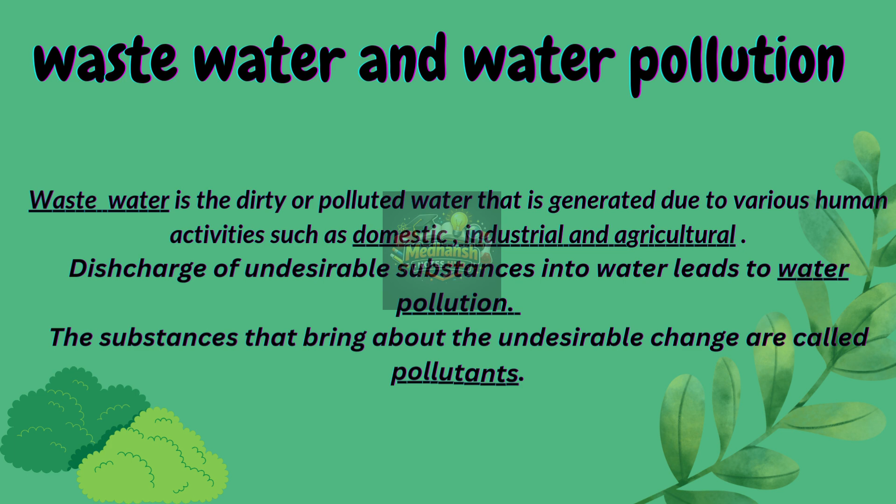Wastewater and water pollution. Wastewater is the dirty or polluted water that is generated due to various human activities such as domestic, industrial, and agricultural. Discharge of undesirable substances into water leads to water pollution. The substances that bring about the undesirable change are called pollutants.

Sources of water pollution. There are many sources of wastewater. Some of the important are as follows. Industries and factories produce large amounts of waste that contains toxic chemicals. Many industries do not have proper waste management systems, and the waste mixes into rivers, canals, and later the sea.

Mining activities release several harmful metals and elements which, when mixed up with water, pollute it. Oil spill is a huge concern as large amounts of oil enter into the sea, and a small leakage from the sewer lines can pollute the underground water.

Leakage from the landfills. Landfills are huge piles of garbage that produce an awful smell when it rains. The landfill may leak and pollute the water.

Domestic waste is the waste generated in homes due to day-to-day activities. Human excreta, soap, and detergent pollute the water.

Pesticides and fertilizers are used by farmers for better yield and to protect crops. When these chemicals mix up with water and go to the rivers and seas, they cause many damages too.

An effective sewage system is made up of a network of pipes that carry wastewater to the main sewer of the city. Sewer: the pipes that carry wastewater are called sewers. These sewers are coated with PVC, polyvinyl chloride. The sewer of our house is covered by a manhole cover. The manhole cover helps people go inside and check any leakage and blockage.

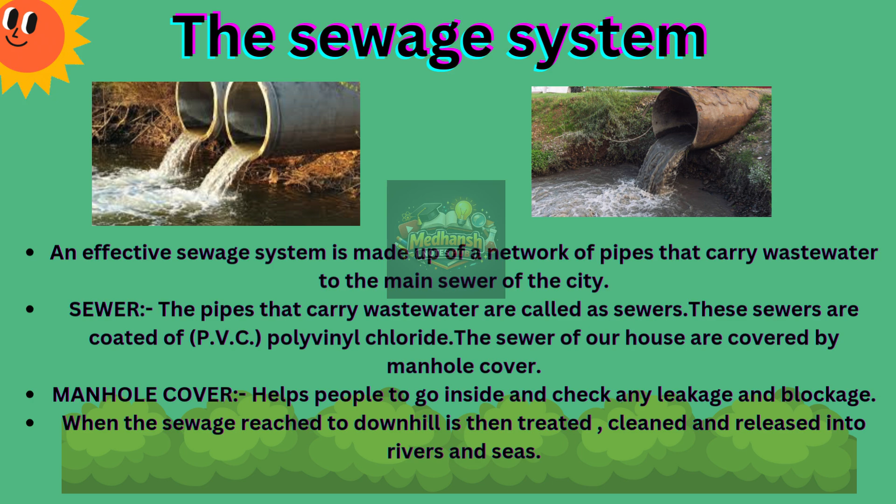Sewage that stagnates as a puddle or pool breeds vectors of diseases such as mosquitoes and flies. This might spread jaundice, malaria, elephantiasis, cholera, and other such diseases. Sewage might pollute freshwater sources and public water distribution systems. Polluted water can act as a carrier of harmful pathogenic organisms that spread diseases. Exposed draining of sewage, especially from hospitals and industries, can cause community harm.

A wastewater treatment plant is a facility that uses physical, chemical, and biological processes to remove pollutants from wastewater. The treated wastewater is then either reused or released into nearby bodies of water.

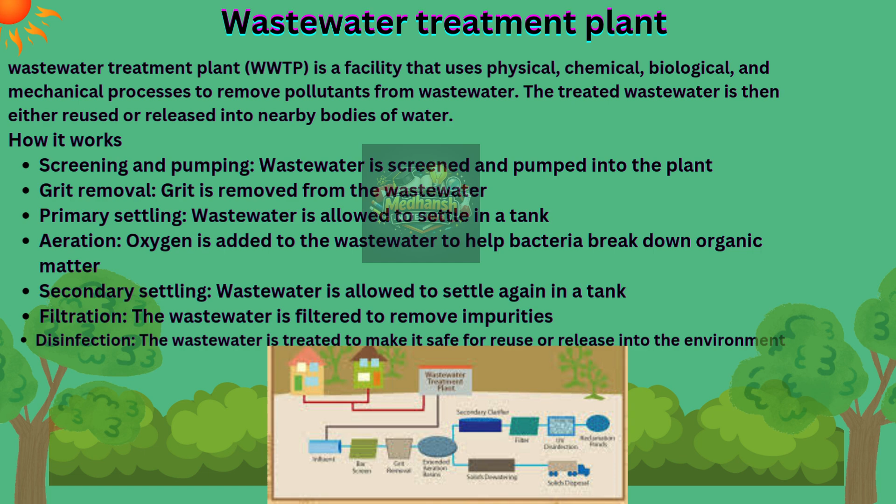How it works: screening and pumping. Wastewater is screened and pumped into the plant. Grit is removed from the wastewater. Primary settling: wastewater is allowed to settle in a tank. Aeration: oxygen is added to the wastewater to help bacteria break down organic matter.

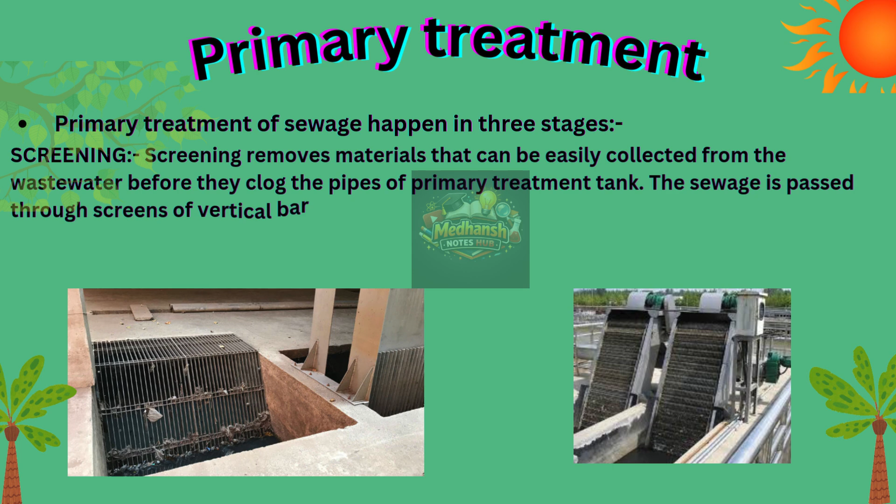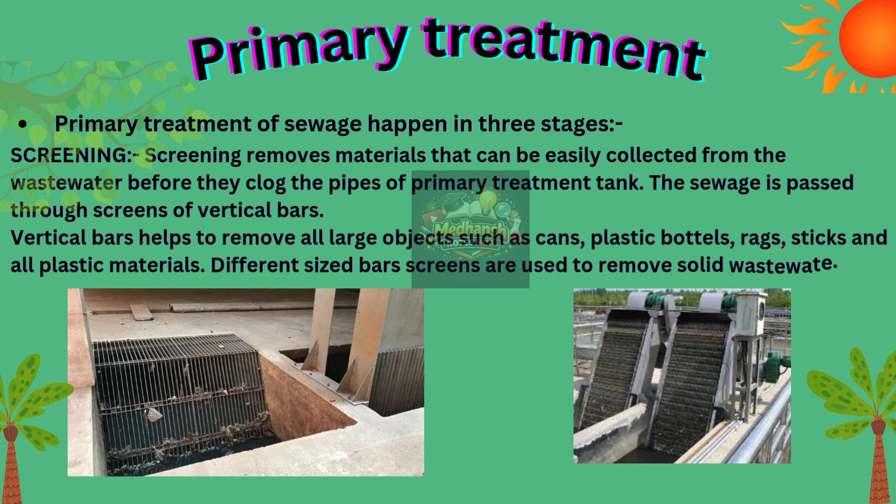Primary treatment of sewage happens in 3 stages. Screening removes materials that can be easily collected from the wastewater before they clog the pipes of the primary treatment tank. The sewage is passed through screens of vertical bars, which help remove all large objects such as cans, plastic bottles, rags, and sticks.

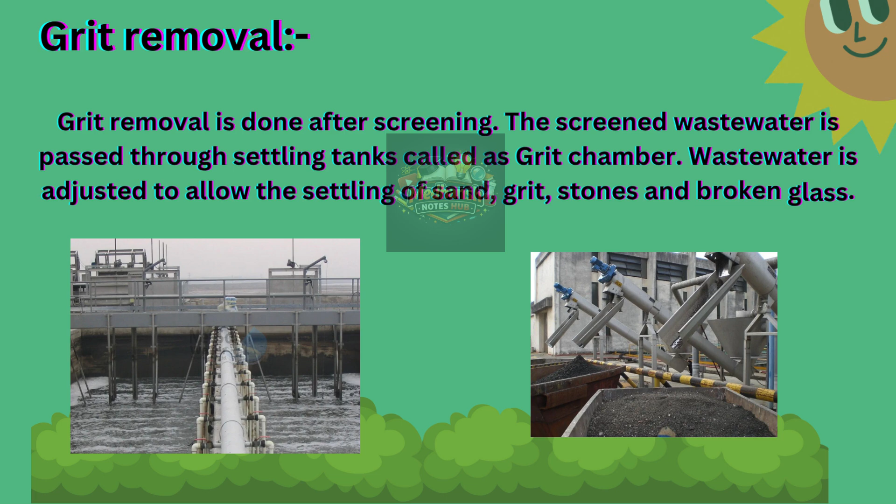Grit removal is done after screening. The screened wastewater is passed through settling tanks called grit chambers. Wastewater is adjusted to allow the settling of sand, grit, stones, and broken glass.

Sedimentation is the deposition of sediments. It takes place when particles in suspension settle out of the fluid in which they are entrained and come to rest against a barrier.

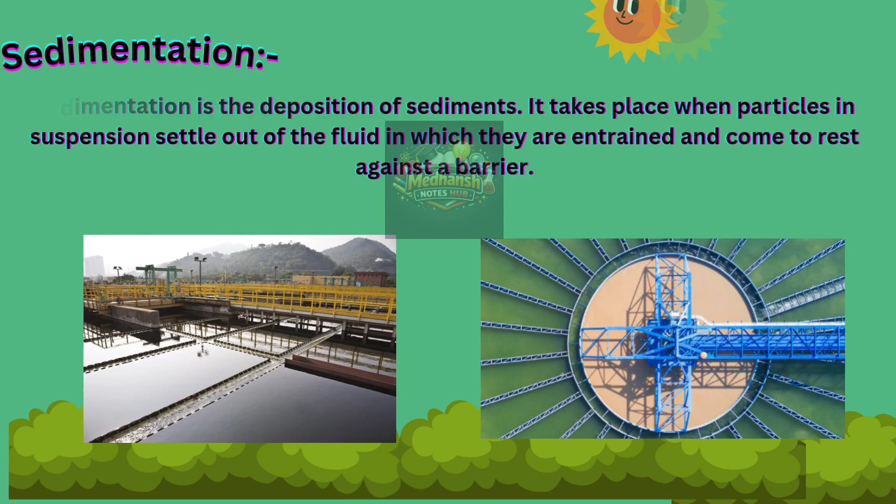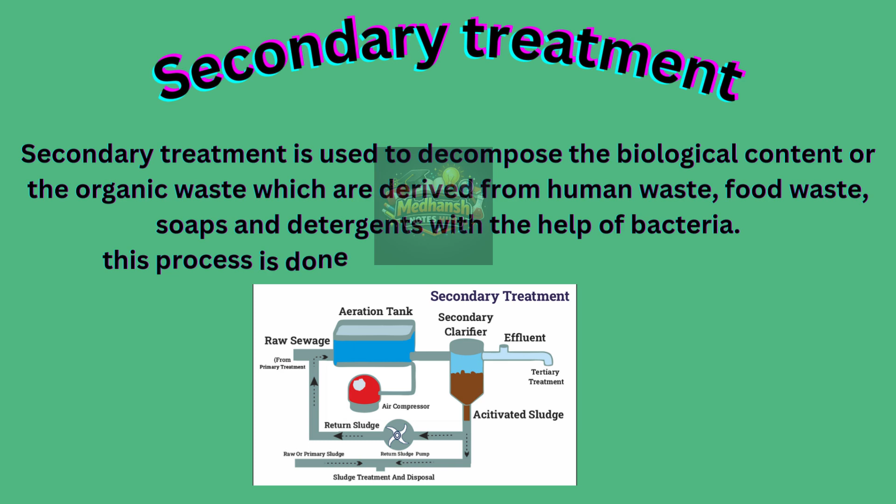Secondary treatment is used to decompose the biological content or the organic waste which are derived from human waste, food waste, soaps, and detergents with the help of bacteria. This process is done in open tanks called aeration tanks.